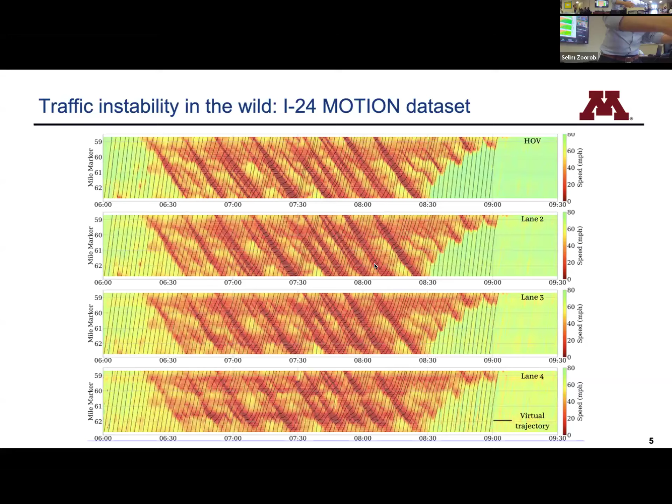But I'm going to skip 3 or 4 years of math and just show you the result. And that is this video here that shows where we did exactly that. So what you see here is that same ring road setup, 22 cars. The vehicle with the arrow on top of it is autonomous capable. It's currently being driven by a graduate student. You see the speeds at the bottom, and you'll see relatively quickly stop and go waves emerge.

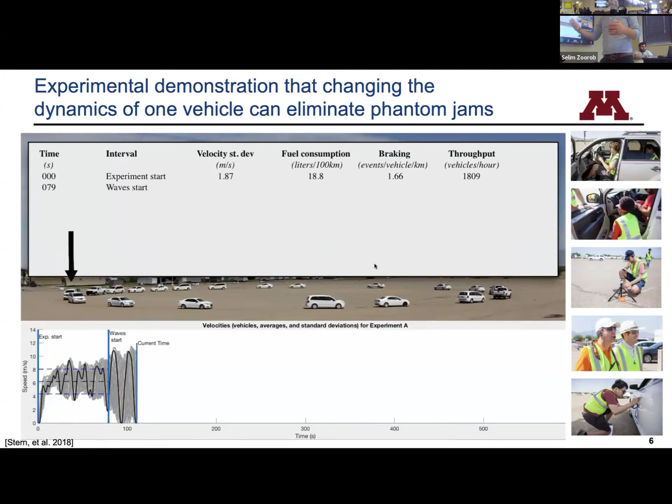22 human drivers. At this point, what we do is we hand the control over on that one vehicle to an automated controller. And so now the autonomous vehicle has taken over, and it's driving a little differently, and it's driving a little better. And the nice thing is it's able to totally smooth out those traffic waves.

To be clear, the other 21 people on that ring had no idea what was going on. We paid them. We told them, show up, we'll pay you to drive in a circle. That's all we told them. They don't know there's an autonomous vehicle. But that one vehicle changing its driving behavior changes the dynamics of the whole problem. And that's kind of the premise of what a lot of my concerns and a lot of my hope is resting on.

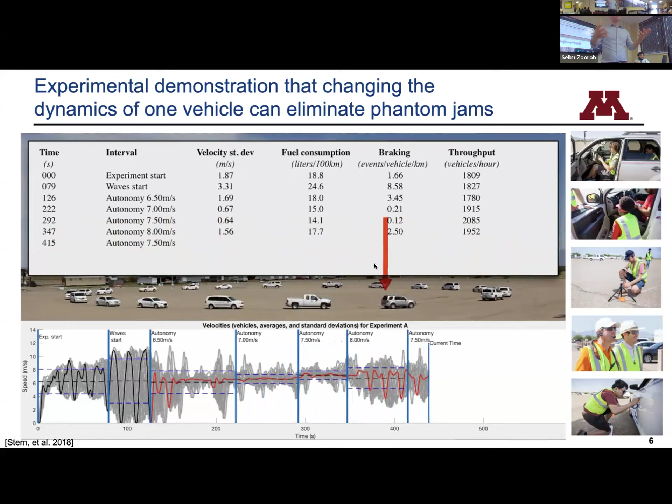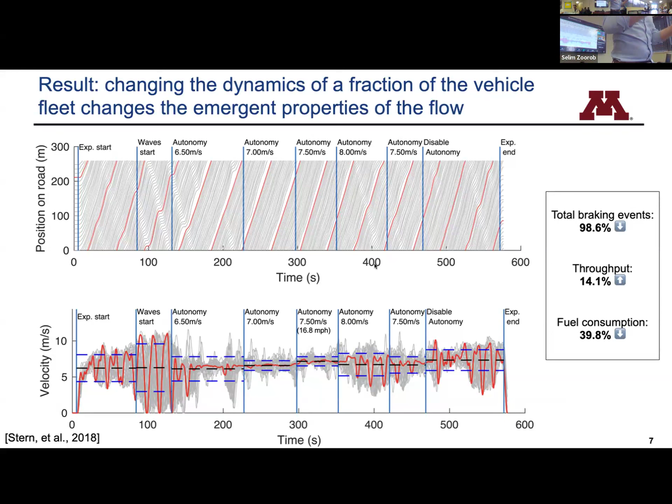Okay, so you can see pretty clearly here, these are space-time diagrams, traffic engineers love these, time on the horizontal axis, position on the vertical axis. You can see where those traffic waves emerge, and as soon as you activate autonomy, the traffic smooths out. Now that is a very purpose-built autonomous test vehicle that's designed with a controller intended to dampen these traffic waves.

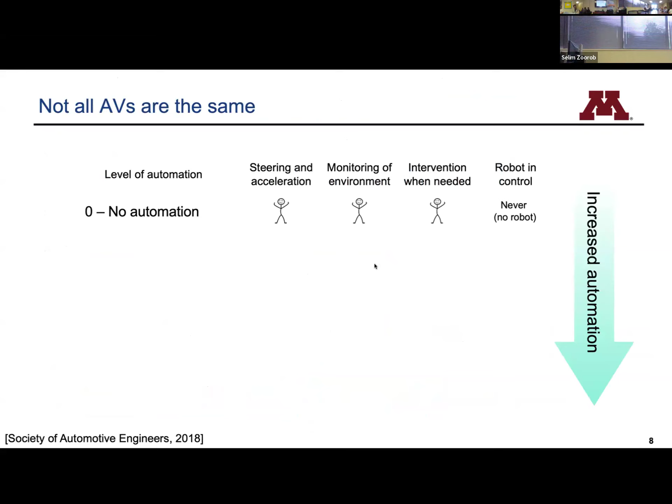The question is, there's a lot of different types of autonomy and different levels of autonomy. Many of you are familiar with this, but you start at level 0, what many of us drive. That's not an autonomous vehicle, and who's in charge of the vehicle is always the human driver. But as you introduce level 1 driver assistance, level 2 automation, you're taking some of the driving tasks and handing them over to the vehicle. As you go to higher levels of autonomy, you're taking more of those tasks and handing them over to the vehicle in more and more situations.

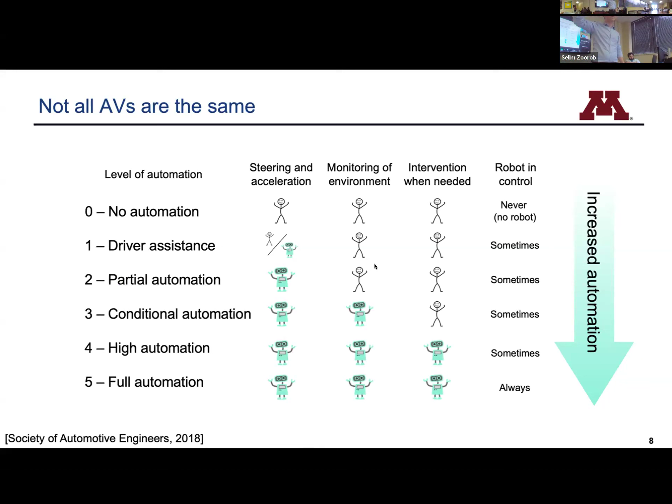And while full autonomy that solves our congestion problems might be a ways away, it turns out that we have a lot of vehicles already on the road today. Anecdotally, the rental car I picked up to drive here from Raleigh-Durham has adaptive cruise control. I drove it last night. What is that doing? That's taking some of those driving tasks from the human driver and handing them over to the vehicle. We just said that doing that, depending on how those things are programmed, has the potential to totally change the way the traffic behaves. Might have implications for things like throughput, as we saw.

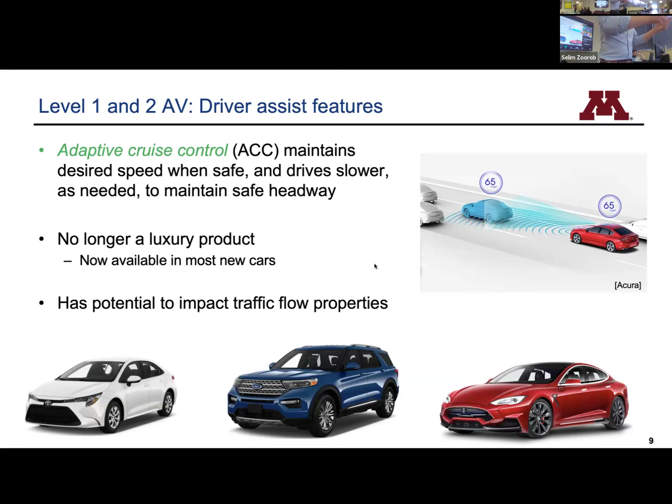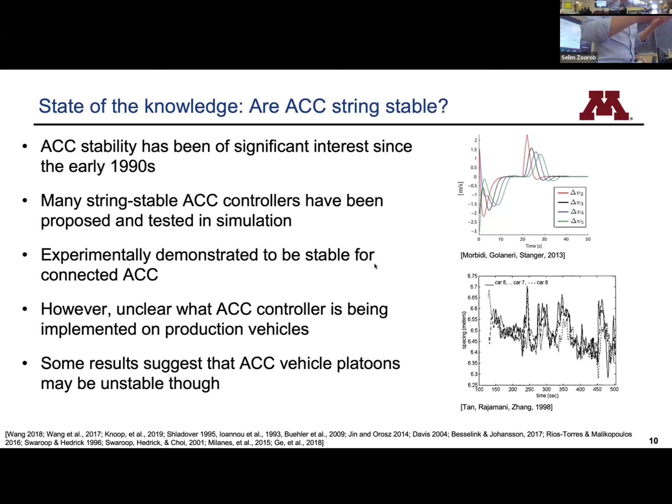Now, if you look at the literature and ask, are these adaptive cruise controllers, or ACC, string stable? Look at literature from the early 90s, pretty resounding yes. Easy to build them to be string stable. Okay, so problem solved. Not quite. Turns out when you rent one, or if you drive one and you observe it, you will see that it perhaps isn't actually string stable. This is what I noticed a couple of years ago.

So I decided to rent a whole bunch of different ones and test them. You put a GPS receiver on one car in front, that's your lead vehicle, and a GPS receiver on an adaptive cruise control vehicle in the back. You drive both of them. The back vehicle has ACC on. The front vehicle speeds up, slows down just a little bit, and you see how the following vehicle reacts.

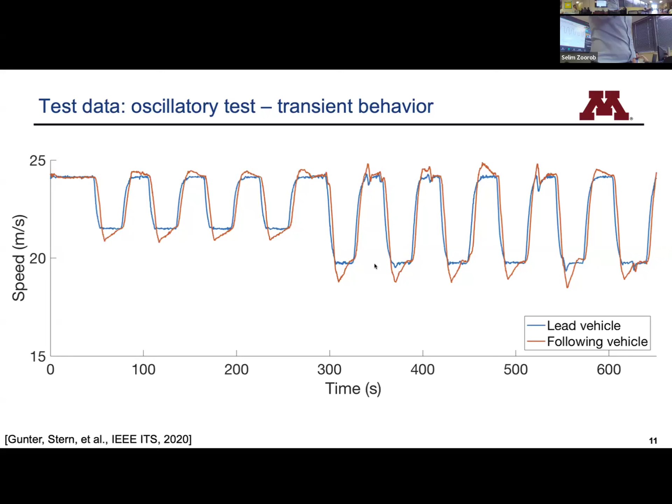And if you look at the data, it turns out that, well, it starts to overshoot a little. In fact, we did this with sort of a platoon of 7 ACC vehicles. The front vehicle hits the brakes a tiny bit, and by the time you get to the 7th vehicle and back, you're slowing down by 30 miles per hour, so much so that this particular make and model said it's no longer safe to drive with ACC on. This is a massive queue that I'm hitting in back, the backup, and I need to hand control back over to the human driver.

And so, yes, in theory, you can design them to be string stable, but the car companies, and to be clear, they're building cars that are safe, that are comfortable, that sell, but they're not building cars with traffic properties in mind. And that's because there's a whole bunch of nonlinearity in the engine, the transmission, everything down to the road tire interface that adds delay and makes it a much harder problem than just simple plant dynamics.

Okay, so we started with human drivers are unstable. If we have good AVs, they're string stable and can stabilize the flow, but the current AVs that we have, I will say not that you guys have, because I've seen much better today, but the current AVs that you'll buy off the lot or that you get off the lot in Enterprise, those are string unstable. So what does this mean for traffic flow? That's what I want to think about a little bit.

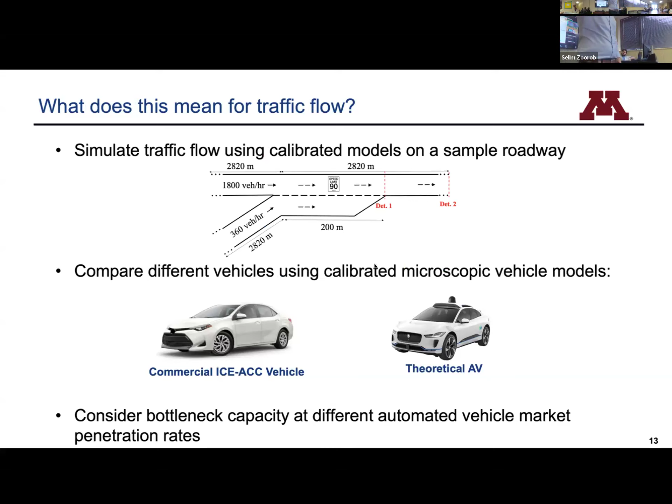We can look at this in simulation. We've spent a lot of time building really nice car following models for different types of vehicles based on that type of leader follower data that we've collected. And we can look in simulation at what happens. So first, if you look at the literature and say what ought autonomous vehicles to behave like in the future, and you model that, what you see is an increase in capacity, right?

So this is a fundamental diagram. If you're a traffic engineer, you might have seen this before. You've got flow versus density. The higher the density, the higher the flow, until you hit a critical density at which traffic breakdown occurs, and that's where congestion sets in. And the nice thing about theoretical autonomous vehicles, like we saw in that experiment, the ones that we want but don't quite have yet, they're going to probably mean congestion sets in at higher densities and you get a higher maximum throughput.

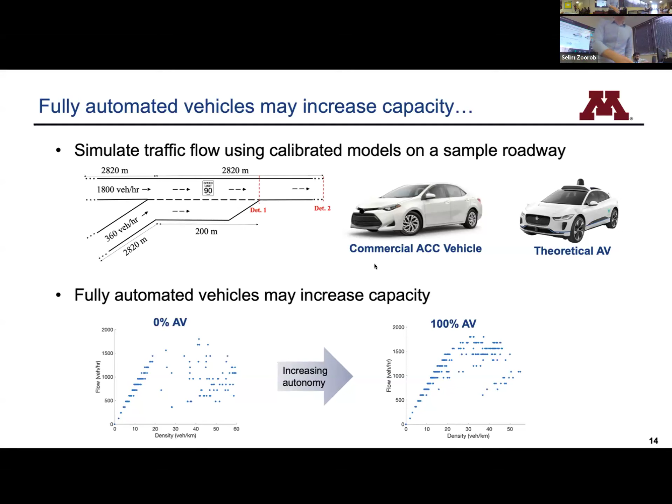If you're a traffic engineer, that's awesome. 30% higher throughput, that means your 3-lane highway just became a 4-lane highway and all you did was change the cars that are driving on it. You didn't have to build a single lane mile, right? But if you look at the data from the adaptive cruise control vehicles that we have, you see a different picture. I'll look at different percentages of cars using adaptive cruise control, and what you see is maybe a 20 or 30% reduction in capacity. So your 3-lane highway just became a 2-lane highway because people turned on their adaptive cruise controller. And all of a sudden, your 3-lane highway that was already nearing capacity is now far above capacity.

Okay, so my vision for how we can address that is we need to know who's driving, or the properties of the vehicle driving determine the characteristics of the flow. And the characteristics of the flow are crucial for doing control on that flow. Ramp metering, variable speed limit, etc. And so I envision a world in the future where we look at who's driving. Maybe we do some sort of driving pattern recognition to determine what types of vehicles are driving.

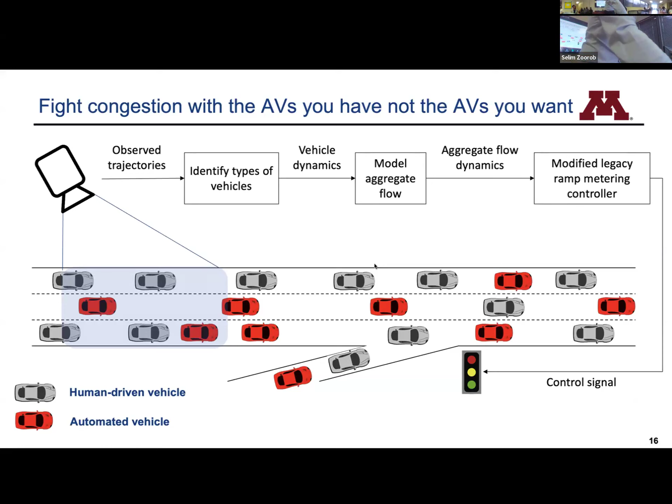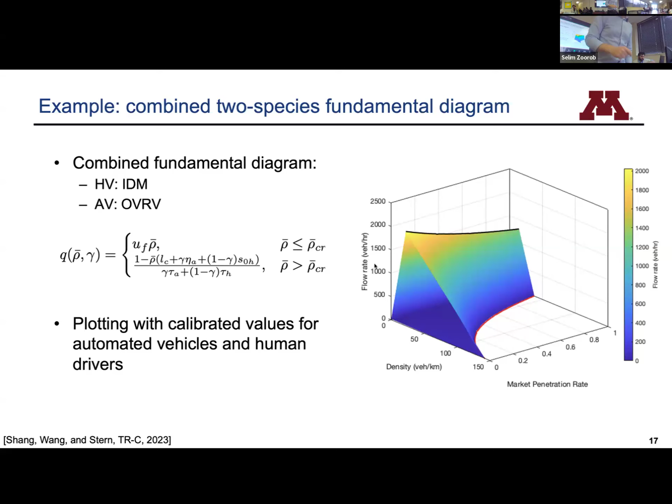We then use that to come up with sort of a fundamental diagram that doesn't just depend on density, but where flow depends on density and market penetration rate of autonomous vehicles, or market penetration rate of adaptive cruise control vehicles. Basically, not just what's the current density, but what type of vehicles are here, what flavor or what variety of vehicles are here, because that ultimately is what determines the flow properties, and that then could be used to update the control. And I have a number of different results sort of along those lines. So that's the big picture vision.

There's one more thing that I will say, and that is this goes both ways. So if you imagine a malicious attacker slightly changes the way vehicles drive, you could also play this game maliciously and deteriorate the flow. And this is another area that I've been looking at. The challenge here is an obvious attack is drive the car off the side of the road. But it turns out if all vehicles of a certain make and model drive off the road suddenly or crash into other cars, that's really easy to pinpoint.

But if all the vehicles of a certain make and model just drive a little bit worse, you could see massive increase in congestion without being able to tell what's going on. And I think that's one of the risks. We've looked at some simulation work that suggests that very minor changes to the vehicle behavior mean relatively large changes to flow, and that could be pretty damaging.

So in summary, increased vehicle autonomy is going to change traffic flow dynamics. The short-term trend, likely decreased capacity. The long-term trend, likely increased capacity. Either way, if you're a traffic engineer, you have to deal with that different capacity, which means if we know what types of vehicles we have, we can perhaps change the way we do control and customize it to the traffic makeup.

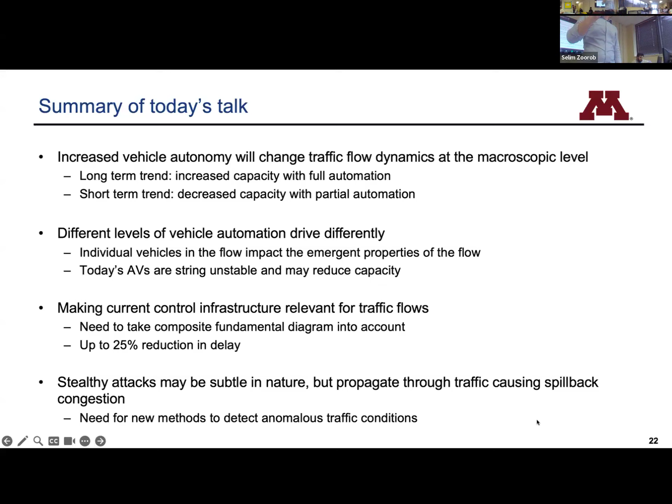Finally, there's what I call these stealthy attacks that could happen through some sort of malicious software update. And I think while they're very difficult to localize, there's certainly a lot of room for work in terms of how do we identify these and then how do we combat these.

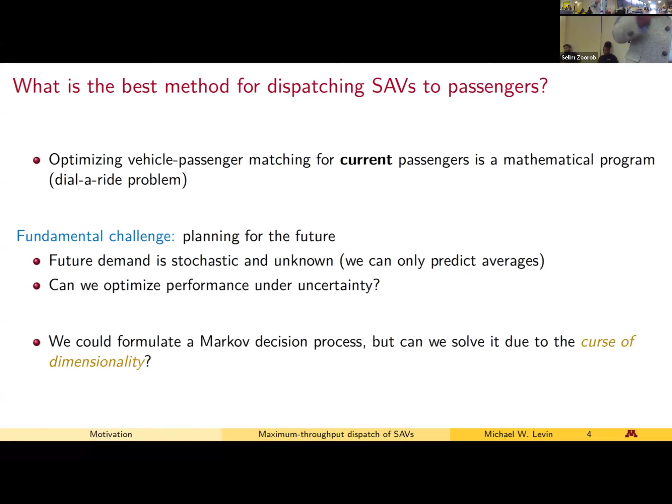And so trying to optimize this situation where we want to not only provide service to the current passengers, but also people in the next 5 minutes, the next 10 minutes, that becomes a Markov decision process where we have this stochastic model, and we have optimization decision variables within it. You cannot solve this computationally. There are too many dimensions. What you can do is find a simple mathematical solution algorithm and try to derive some nice performance properties mathematically. So this is why I like this, because there's math, but it's very useful math.

Okay, so here's where I'm going to introduce some techniques. What we want to do is keep track of the longest waiting time of the customer at any location. So maybe if all of us in this room got our phones and started requesting Uber, whoever's been waiting the longest, that's the person we're going to keep track of. That's the person we're going to serve first. And then the next person in line, that's the person we would serve next, right?

And if you imagine a large group of people with these waiting times, we want those waiting times to be bounded. In other words, as we have more passengers, more customers entering the system, we don't want you to wait 10 minutes and the next person waits 20 minutes, next person 30 minutes. We want it to be like, okay, it's on average a 10-minute waiting time for everyone. So if these waiting times on average are unbounded, some customers are not being served. The flip side is if we have them being bounded, mathematically saying it's less than infinity, then we are serving everyone at a good rate. And that's what we want.

Okay, so how do we get that to happen? So we have a model, and I'm not going to go through all the details of the math. Basically what we're saying is I want to track the change in a waiting time. And that change in a waiting time depends on whether the passenger gets picked up. Then the waiting time goes down because the person who was waiting longest got picked up. Now that person's not waiting anymore. So you track that, and the rest of it's just kind of different cases.

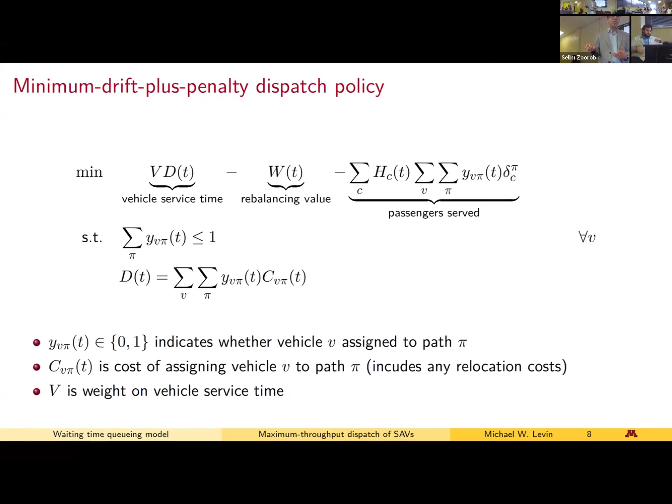And then the rest of it is just constraints on where we can send the vehicles. Okay, so this is a simple, kind of intuitive decision. You might be asking, why is this a good idea? That's because mathematically you can prove that this intuitive control algorithm will actually serve all the passengers, if at all possible. And that's nice because if you look at what people are doing to match vehicles and passengers, a lot of the time it's very heuristic. It's maybe machine learning, it's maybe solving an optimization problem that only works for the next 1 minute, but doesn't really consider the future at all. And so this is actually considering the future and looking forward, but it's still quite easy to solve.

All right, there's various math on how you implement this. I spent a lot of time working on that, but I don't think that's what we want to talk about here. So here's some results on what this looks like. Well-known test network, I borrowed it because he had some data.

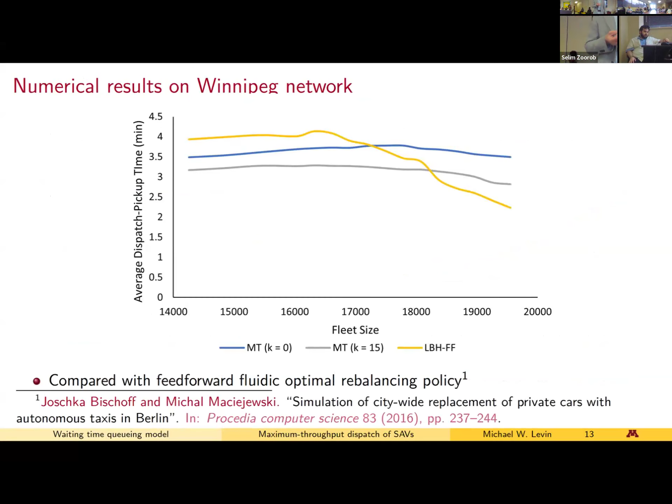Various results. So we also compared this to some other controls in the literature. This LBHFF, that's an existing algorithm called feedforward fluidic optimal rebalancing. The point is, we can do better, especially when we have a small number of vehicles, we can serve more passengers. And we can prove that mathematically, and we can show it in simulation.

So the other thing that's really interesting here is you might say, okay, we have some number of people in Greensboro. How many vehicles do we need? Like, Ollie's got 6. How many vehicles do we actually need to serve all the trips? And this actually tells us, because part of the process of proving that we can serve everyone is determining what's the set of passengers that can be served.

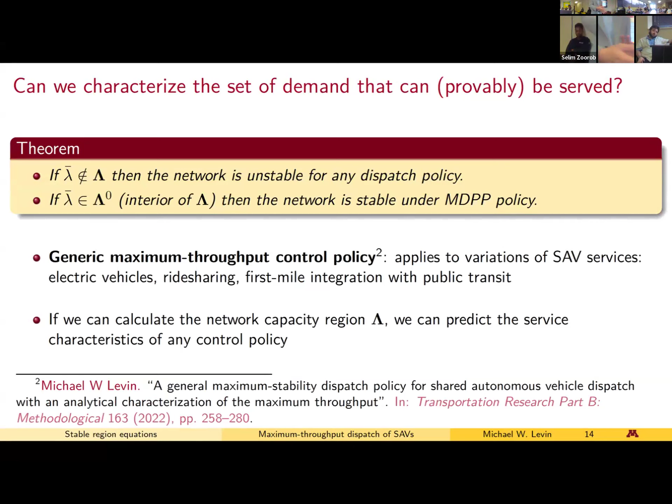So we can write down some equations that say, okay, if we have 10 vehicles, this is how many passengers we can serve. And here's mathematically what that would look like. What we have is some equations that say, okay, the vehicles that go to, say, campus, they have to leave campus at some point. You can't have vehicles appear or disappear there.

We have to serve all the customers, that's what we want. And we also look at how much time it takes for each trip. So if on average it takes 10 minutes to pick you up and then 20 minutes to drive you, that's 30 minutes. Now, if we look at one vehicle making a 30-minute trip on average, it can make 2 of those per hour. So we can figure out how much effective service time we have, and that helps us figure out how many vehicles we need.

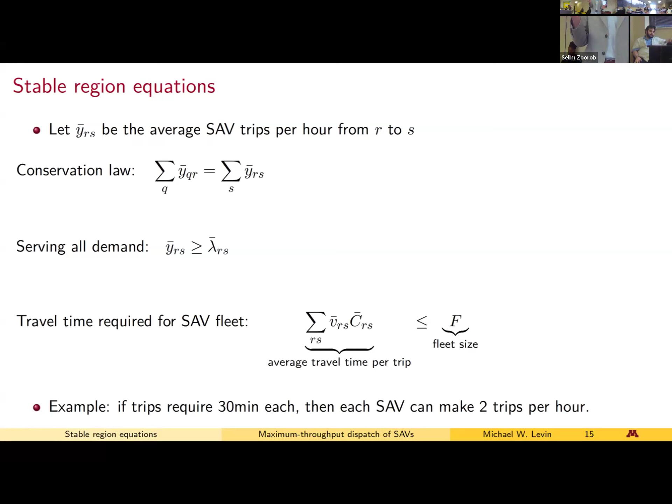So with this, we could optimize how many vehicles we need. If we're looking at, say, electric vehicles that need to recharge, we can say, okay, if we place the charging stations nearby, each vehicle can serve more passengers. But if we place them farther away, it might be cheaper, but we need more vehicles. So we can explore that trade-off mathematically. And here's kind of the optimization problem of saying we want to minimize the cost associated with serving all the customers that we expect to have.

So here's some graduate students and undergraduate students who worked with me. Hopefully, it can give you kind of a flavor of trying to solve a real world practical problem with the core mathematics of what this problem is. And yeah, happy to talk about that more later. That's fine.

Thanks, appreciate that. So again, in the spirit of time, we'll keep the questions towards the end, and we will move on to our next speaker. Okay, hopefully you can share your screen. All right, I feel pressure because 2 speakers have had their time. I think I am going to be the one who yields the balance of my time. Okay. All right, so actually, yeah, why don't I introduce you first?

So we have Dr. Seongjin Choi. He's an assistant professor in civil engineering at the University of Minnesota. He focuses on machine learning and generative AI models and working with transportation mobility data. Prior to joining University of Minnesota, he was a postdoc at McGill in Canada and graduated from KAIST in South Korea. And all his degrees are in civil engineering, and his research we'll learn more about as he talks about this. Right. Thank you so much for giving me this opportunity to share what I've been doing so far as a researcher.

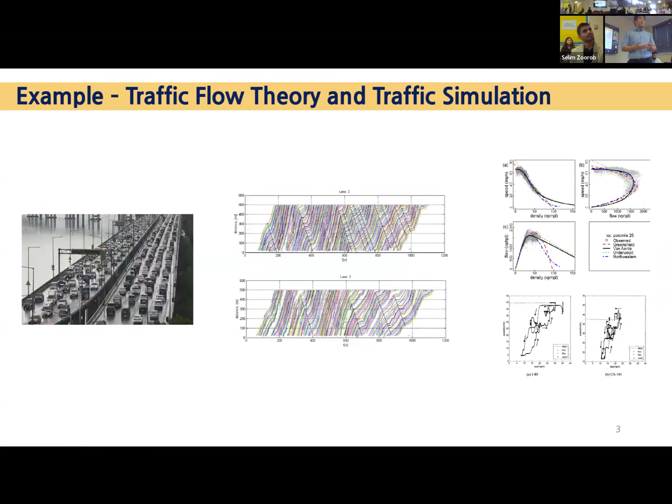So, for example, if we have traffic, we collect, say, traffic state data, like traffic flow, traffic speed data, or we also collect trajectory data from, for example, NGSIM, and then we develop traffic flow theory and driving behavior models to model it. And we do many things out of it, but one of the things we do is that we build a traffic simulator, and then we generate some virtual world where we can simulate things. So essentially, we are generating synthetic data to understand what's happening in the real world.

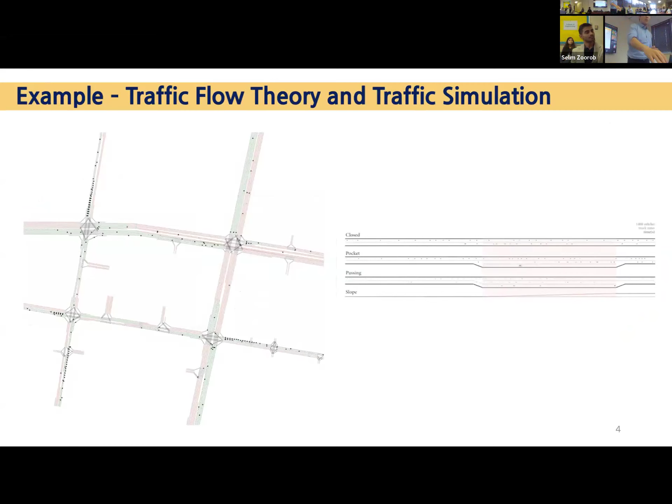So my definition of data, and I think some of us will agree to this, is that data is a sample from a distribution. And as a modeler, what we are doing is to understand this distribution by modeling the distribution of the world. Okay, and there are many ways to learn the distribution from the data. The most straightforward way is that we assume some kind of distribution. So for example, we assume that our data is following some Gaussian distribution or Poisson distribution, and then we might want to fit the parameters associated with those distributions.

But one promising and interesting approach is that nowadays, because of these new neural network methods that we are experiencing right now, we can train a neural network to represent some distribution. And this line of work is sometimes called deep generative models. In some areas, they call it generative AI because they think it sounds more fancy. So essentially what we are trying to do with a deep generative model is to train a neural network given training data. We are trying to train this model to estimate the distributional properties. So for example, we are trying to estimate the likelihood of the data sample, or sometimes that's too hard.

So we are trying to generate samples that have those realistic distributional properties that were in the training data. Okay, so in this talk, I'm going to focus on three different things. The first one is my PhD work, where I focused on the generation part of the generative model. The second part is density estimation, for estimating the likelihood directly from the data.

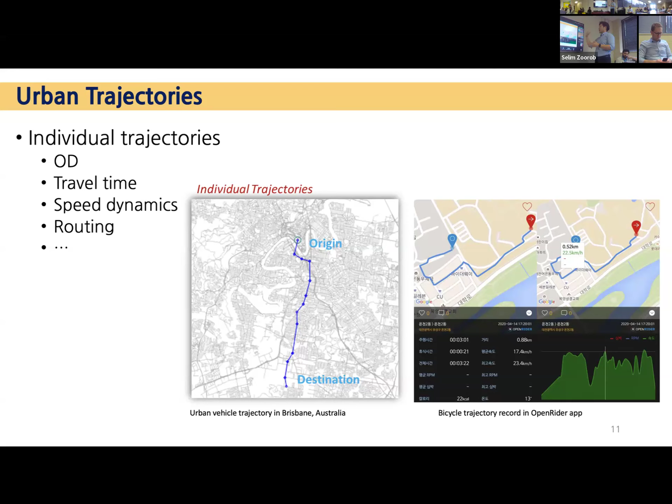So first of all, this is the type of data I was very interested in during my PhD. We called it urban trajectories. For example, here we have a trajectory from Brisbane, Australia. From this data alone, we can already find a lot of information about this trip. We have the origin-destination information. Sometimes we have the routing information. And for some types of data, we have the speed contour of how the speed dynamics work during this trip.

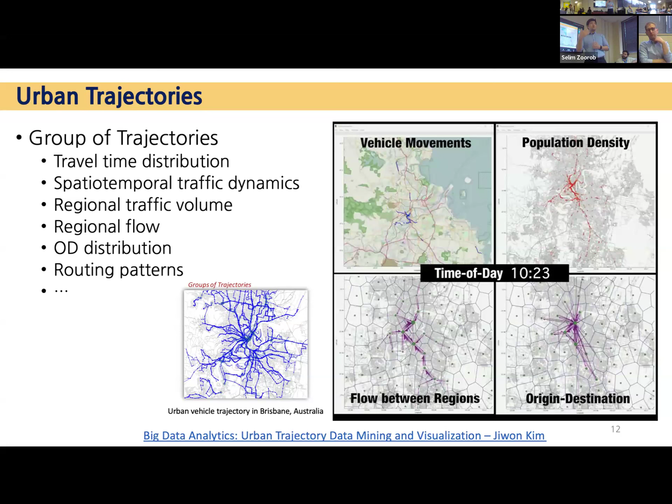So by generating this type of data, we can make a lot of different planning decisions and also support real-time traffic operations. And when we think about generating this type of data, as I mentioned during my introduction, we've been doing this type of task for many years, but until recently, we didn't really have the observed true trajectory. So we relied on some mathematical assumptions of trip generation, route choice, and mode choice, and then used some behavior model to simulate. And then we hope that the simulated trajectories match the unobserved true trajectories based on some measures like aggregated traffic flow.

However, there are some limitations, such as the complex model building and calibration process. If you have ever done some kind of calibration, you know that there are so many dependencies, so it's a lot of headache. And sometimes we rely on strong behavioral assumptions, and sometimes we rely on very simplified physical processes, such as approximating with a first-order equation.

But what if we have an almost infinite number of data points and almost infinite computing resources? We are kind of experiencing that era right now, because we've seen many generative AI models like ChatGPT, which are trained on an almost infinite amount of text data and trillions of dollars of computing resources. Then we can approach this problem differently. And actually, we are approaching that era because we have connectivity, connected automated vehicles, and the Internet of Things, which will generate, say, more than 100 gigabytes of data from one device every day.

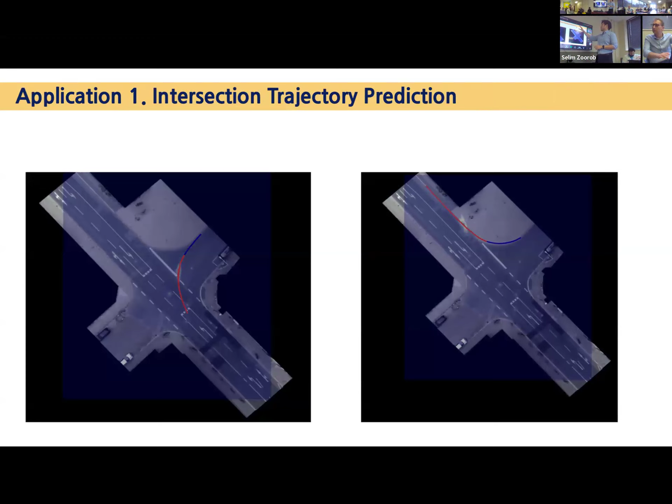For this specific task, I'm using a method called normalizing flow. Essentially, we are learning the transformation function from a simple distribution to a complex distribution. And there's this very nice mathematical property that it gives the exact likelihood of the data sample, meaning that if we sample something, we know how likely that sample is. So for example, if we are applying it to pedestrians, we can know at which time step, at which location, how likely it is for this vehicle or pedestrian to be at that location. This visualization shows the likelihood of future trajectories.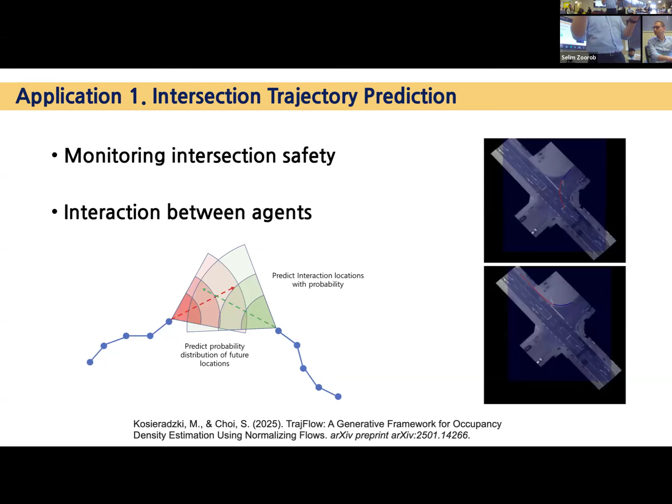If we have this type of model, we can use it for intersection monitoring systems, and also for behavior analysis on interactions between agents. We are also using airplane trajectories. For example, here we are predicting trajectories of surrounding conventional aircraft, so that we can use that information to plan the routes for UAM, the air taxi, eVTOL, so that it can pass through this uncertain airspace between this airport and the Seoul city center.

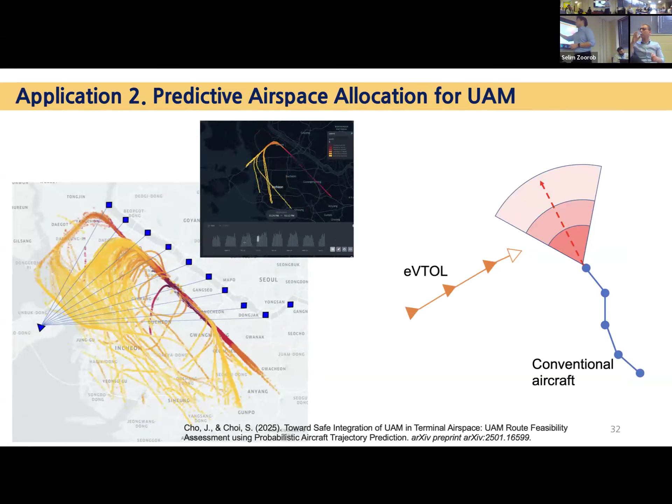So this is the illustration of how we designed our prediction model, and how we use that information to plan the green dots here, which avoid a crash with the red one, which is the conventional aircraft.

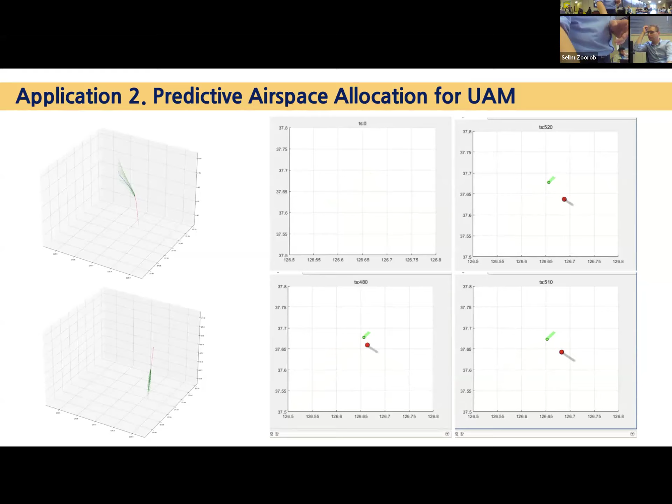So I talked like there are so many brilliant new things about this, but there are also some limitations that have to be addressed. One of them is scalability. When we are dealing with large high-dimensional data, or external factors that we want to consider in the modeling, the model blows up, and usually the number of parameters increases exponentially with the number of inputs we have. So we have the curse of dimensionality.

Also, in terms of generalization, typically these models only work on in-distribution cases. Making them work for out-of-distribution cases, so that we can do what-if analysis, is going to be very challenging. That's one of the topics I'm working on right now. One of the directions I'm working on is to make the model learn the causality behind the data generating process, so that the model understands what made this data happen.

If you're interested in this line of research, we recently got a survey paper accepted in TR Part C, a review paper on applications of generative models in transportation research. If you want to read the paper, I have to warn you, the original version was 68 pages. After revision, it's like 80 pages. But we have starter code, including tutorial materials for generating speed contours and household survey data. So you can start working on and experiencing what these models can do.

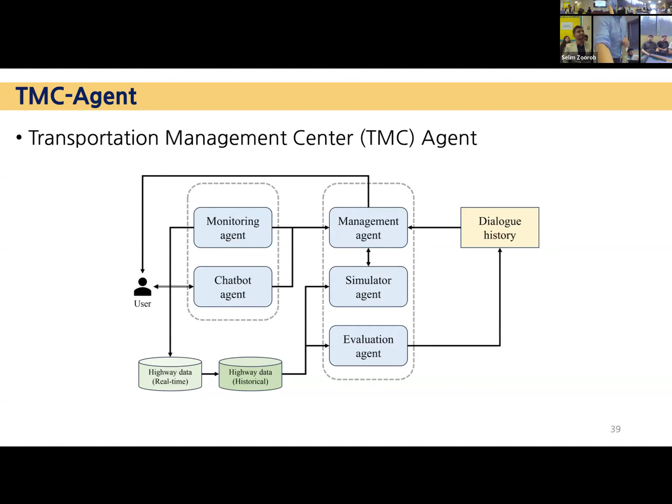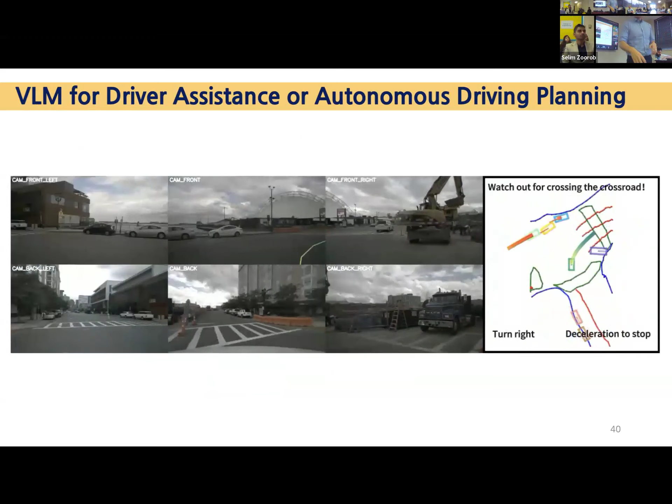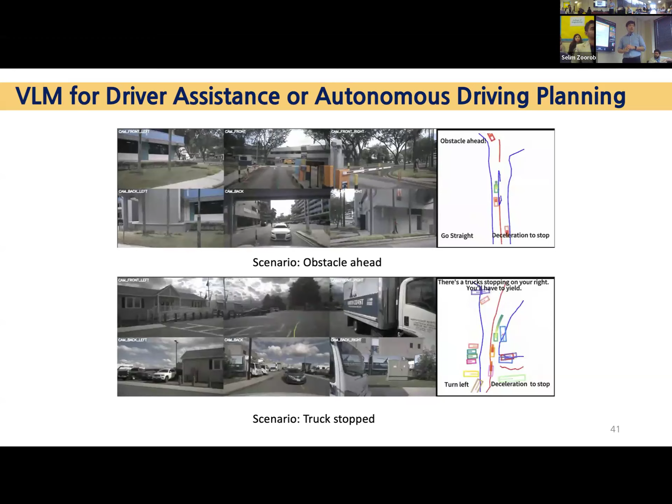Also, we are doing research on using visual language models for driver assistance and autonomous driving planning. For example, this video shows text indicating how it's understanding the scene right now. We are using nuScenes data for this one. If it sees obstacles or a truck stop nearby, it's going to alert the driver and plan what actions it or the driver has to take depending on the circumstances.

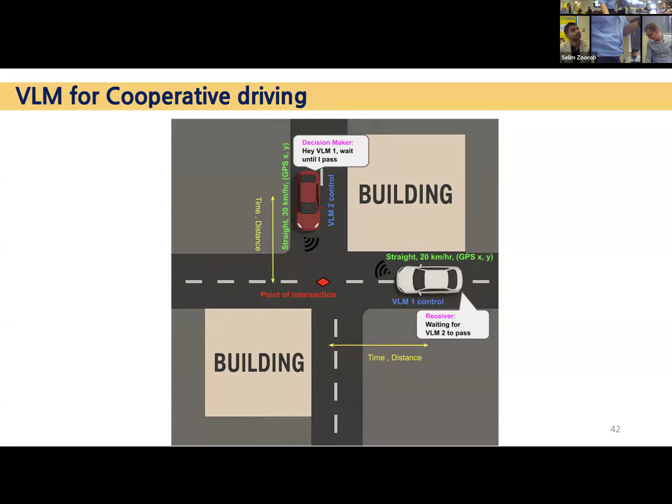And we can even imagine multiple visual language models driving in an urban scenario, talking to each other in natural language to navigate through the intersection. We can also imagine a human driver and a visual language model autonomous vehicle talking to each other to navigate through intersections, as humans do between each other. So that's it. Thank you so much.

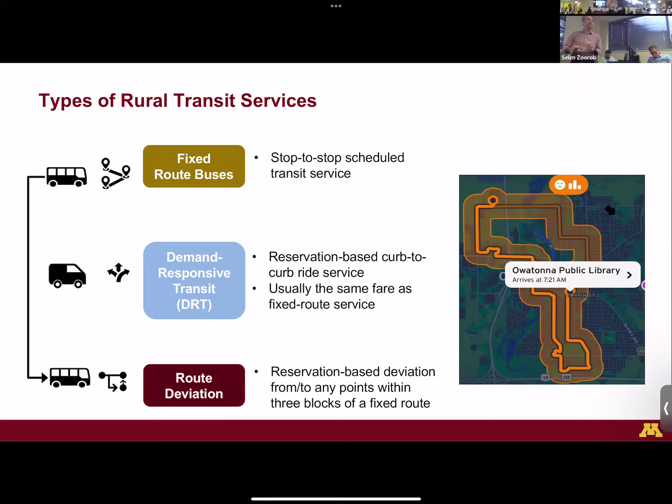So transit is in a situation, and the question is, how can we use technologies to improve transit, to supplement the existing transit systems with mobility on demand system, with mobility as a service platform, and so on. In rural transit, as I mentioned, there are fixed route buses, and there are demand responsive buses, and there are route deviation, which is kind of the fixed route buses, but can deviate up to 3 blocks upon the request of the riders. In Minnesota, we have the Twin Cities region, but the rest of the state is almost rural, with the exception of a couple of larger towns.

There are so many different transit systems that operate in rural areas. For the users, for the residents, it's really difficult to use this system. Sometimes they don't know about the system. Okay, what service is available in my region? And then how to make a reservation, how to make payment, and so on. A couple of years ago, Minnesota Department of Transportation implemented a mobility as a service platform in the southeast region of the state using the Transit app.

The MaaS platform tries to integrate all the information from different service providers and allow trip planning and reservation. And at the time during the project, it was up to reservation, and then booking happened after that. And we were a research partner with this big team of consultants, technology vendors, and DOT. And our goal was to evaluate the system performance and whether it helped the system gain ridership. We use time series analysis. I'm skipping all the equations and the method, and here's the result.

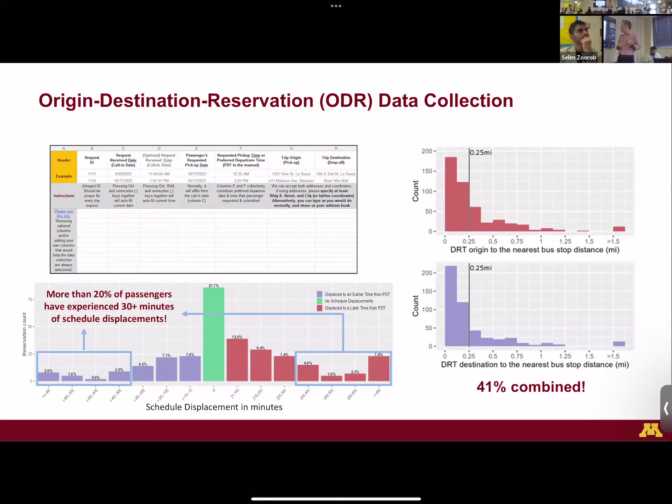And this is because a lot of people who live near bus stops, they don't use the bus. They use the dial-a-ride system or demand responsive system because it's more convenient and not much more expensive. It's pretty much the same fare. And that's about 40% of the riders who can be served by buses, but they're using the demand responsive system. So we propose a platform in which people can be given two options to choose from. The earliest arrival is most likely the curb-to-curb demand responsive system that can serve you. You get to your destination as fast as possible for a fare amount.

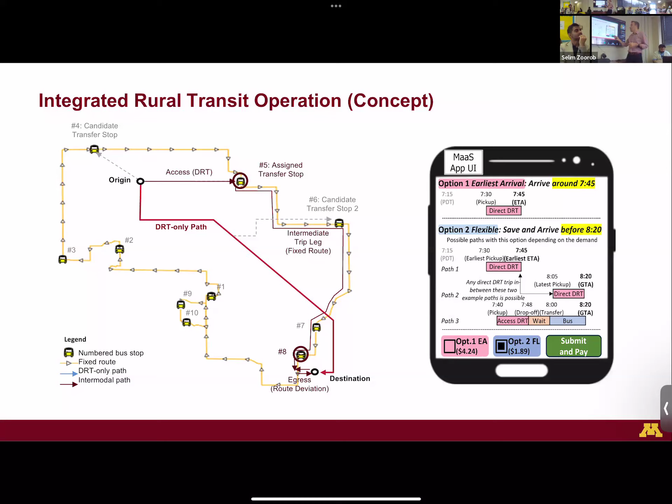Or if you can be served by a combination of demand responsive transit and fixed route service, the system will calculate the optimal routing and assign you to a multimodal trip that helps the system. And then you save on the fare as well, you save some money. We did some simulation to see how it really helps the system.

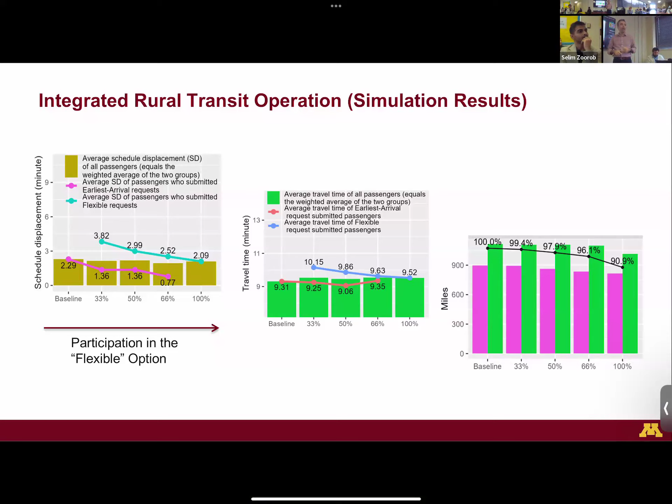As the participation of the users in the flexible option increases, we see that there is a decline in schedule displacement, both for those who opt for the flexible option and for those who did not. The in-vehicle travel time of these people did not actually change, even decreased for one group of people. And importantly, the operating VMT, vehicle miles traveled in the system, decreased up to about near 10%. So in general, it's a great saving because people can save time, both on the schedule displacement and a little bit in vehicle time, and the system can reduce their operating costs and all the externalities of the additional vehicle mileage.

But I mentioned that one of the issues with reduced transit ridership is lack of access to transit systems, especially in auto-oriented areas with low density land use. People more likely opt for owning a car and using their own personal car for their trips. And it makes transit even less attractive. And because people have to walk from the bus stop to their final destination, they have to cross the streets or walk in large parking lots, it becomes inconvenient and even more people opt out of transit.

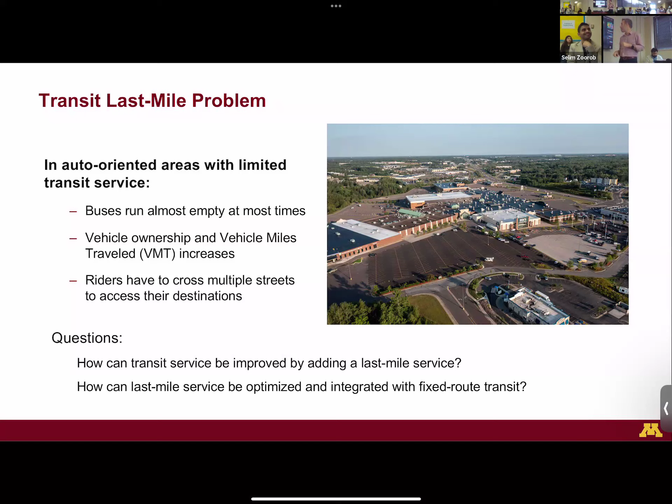The question is how can we use technology to address this issue? And particularly here, we are looking at the physical technology. The previous one was more like cyber technology. Here we are looking at mobility on demand systems, pretty much similar to what Michael talked about, with autonomous vehicles in which users can request a ride through their smartphone, get picked up and dropped off at their destination. But the key point here is that we want it to be integrated with the scheduled bus services. We want people to be picked up as soon as they get off the bus and be transported to their destination. Or if they want to go to the bus stop, the dispatching will be synchronized with the bus schedule so that when you get to the bus stop, the bus is waiting for you to get on.

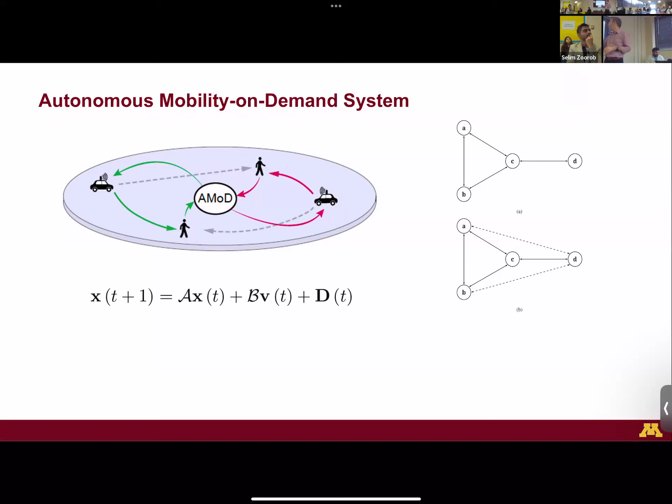So we use a linear dynamical system with state variables being the number of vehicles and number of passengers in each zone. And the control variables are the customer-carrying vehicle dispatching and rebalancing of the empty vehicles. I have probably only one slide with equations, and that's this one, some propositions. There's an infinite number of equilibrium points if we have a network of more than 2 nodes. And more importantly, the equilibrium can be obtained by this system of equations. The number of customer-carrying dispatches should be equal to our demand. And then the rebalancing can be calculated from the system of equations, with E being the incidence matrix of the graph and lambda being the demand, or the mean value for the stochastic demand.

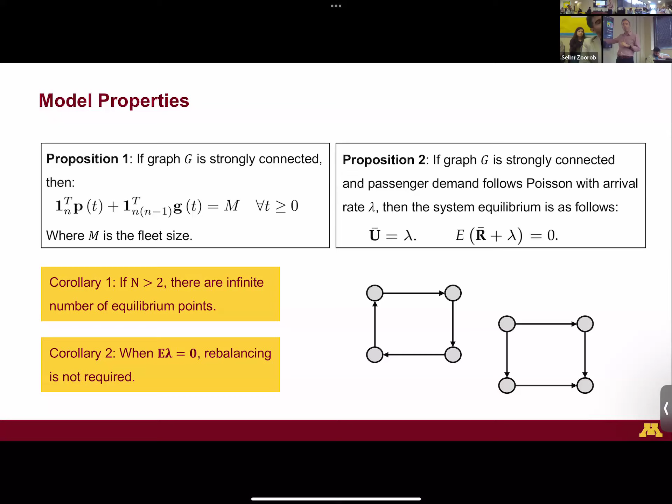2 corollaries. I mentioned the infinite number of equilibrium points, but this one is really interesting. If demand satisfies this equation, rebalancing is not required. Imagine a mobility on demand system with symmetric demand, right? We don't need rebalancing. But that's a very strong assumption that doesn't really happen in reality. But this one indicates that even if the demand is asymmetric, there may be conditions where rebalancing is not required. This is a highly asymmetric demand, but it's self-rebalancing. This is also asymmetric, but it requires rebalancing, because we need to bring the empty vehicles back to where the origins of the trips are.

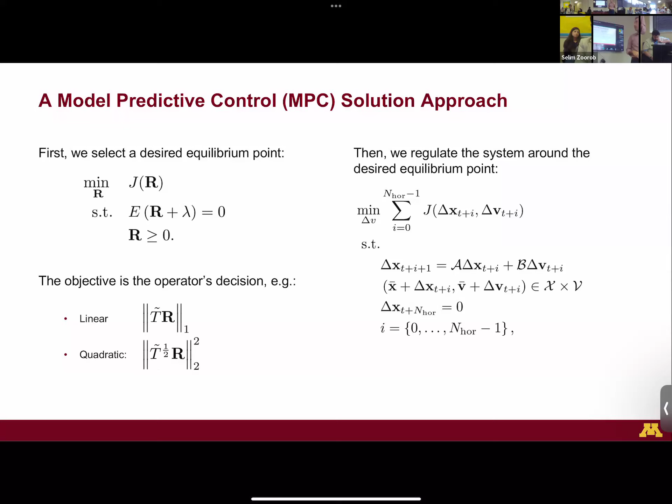And then for solving this linear model, first we need to find the desired equilibrium point. That can be decided by the operator. It can be the cost as a function of the rebalancing scheme, subject to all the equilibrium conditions. And then after finding the desired equilibrium, we can regulate the system around that equilibrium point with, for example, MPC here. I think I'm going to skip this slide and show this one.

This is a case study in Duluth, Minnesota. This is a large shopping area with Sam's Club, Target, a shopping mall, and many other stores. There are buses that bring people here from the residential part of the town, but actually they're not efficient. They're zigzagging through the store parking lots, etc. And people who get off the bus still need to cross the streets and go through parking lots to get to their destination.

And our goal is to develop this autonomous mobility on demand system that can be integrated with the bus system to transport passengers at the doorstep of their stores, at their destination, basically. We develop this learning system and so on.

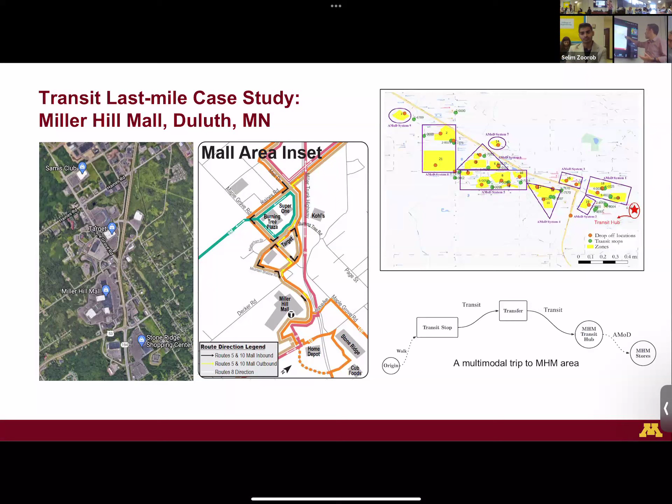The end goal is to have this integrated system such that people from their origin, from their home, for example, can take transit, go near the shopping area, the transit hub, and then use AMOD to get to their destination. And by doing simulation and demand modeling and so on, we want to know how much demand can be attracted to transit. And here are some results.

First of all, the AMOD system itself has a great performance with the algorithm. The waiting time of users on average for different scenarios, different fleet sizes, is 2 minutes or less. The queue length is, of course, correlated, and that's less than 1 at a time at each station. The number of customer carrying vehicles in the system is linearly increasing.

And do you know why? Because people are being attracted to transit. There is more demand for the transit system. People are getting out of their cars and using transit to travel to this location. And therefore, at the end of the day, we need to serve these people. Therefore, the customer carrying vehicles are equal to the transit demand.

But in terms of rebalancing, which is a measure of cost in the system, there's a little bit of increase in rebalancing of the vehicles, but not significant compared to the customer carrying. And last but not least, there is VMT saving in the system as we add more fleet to the system, more people use transit, and then we have net VMT saving in the system.

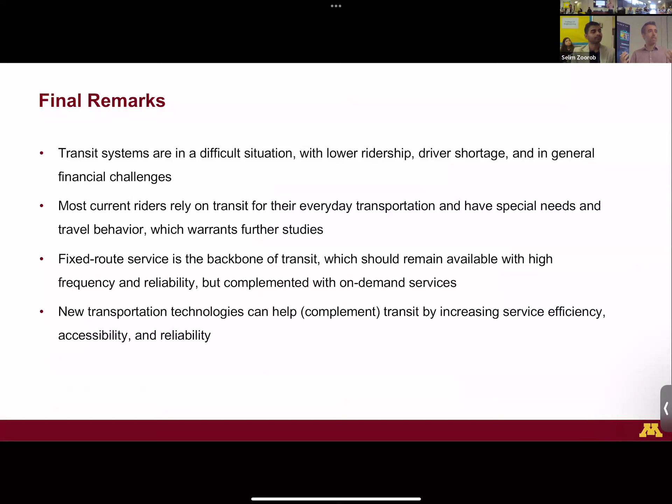So I guess I'm going to stop here. I have some remarks that I'm going to skip. This is more about my philosophy about transit, the fact that we need high frequency, high capacity, reliable fixed route service in urban and busy areas, but we need supplementary services such as autonomous mobility on demand systems to serve these core routes and provide accessibility, basically covering the last mile access issue.